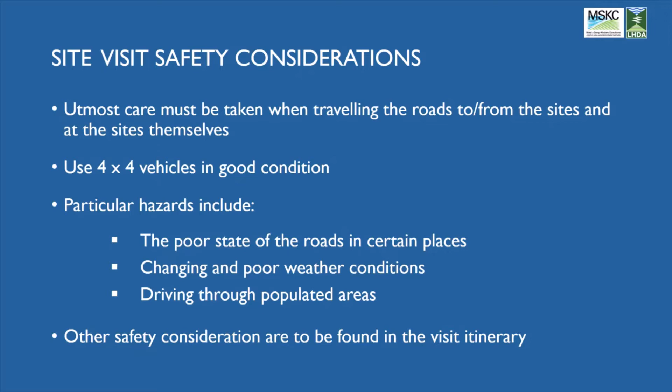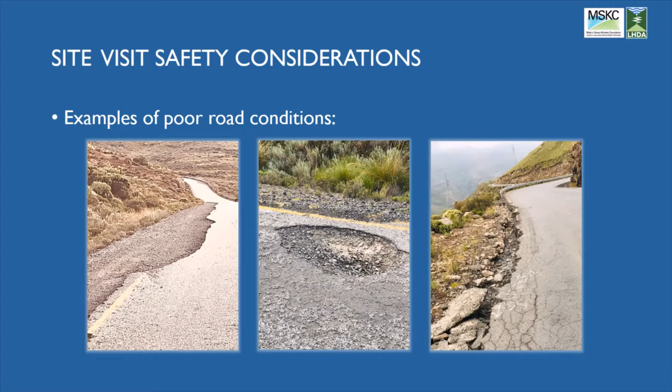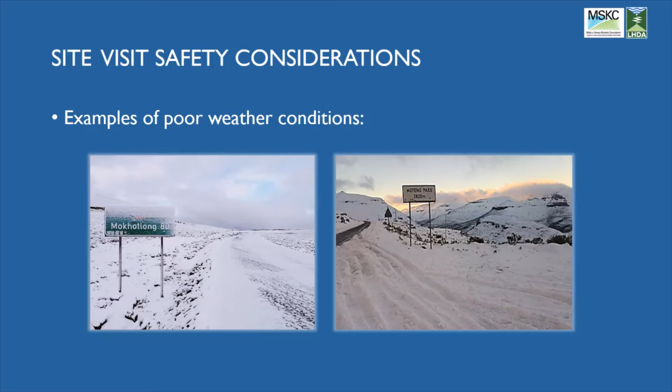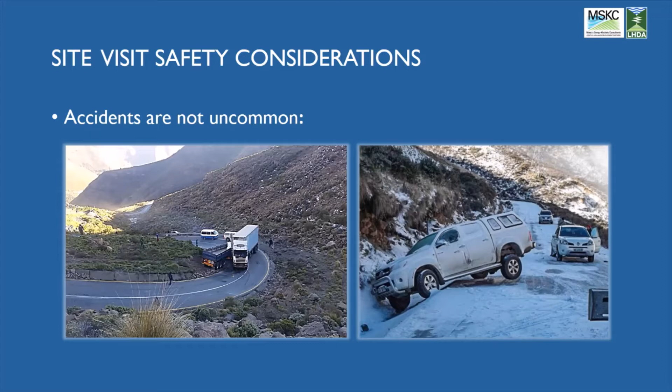When you're driving through populated areas, you need to be aware of pedestrians and particularly children that could enter the road unexpectedly, so make certain you drive through slowly. And also be aware of livestock, which can also enter the road suddenly. With that, I'll hand over to John for the LHDA presentation. Thank you, John.

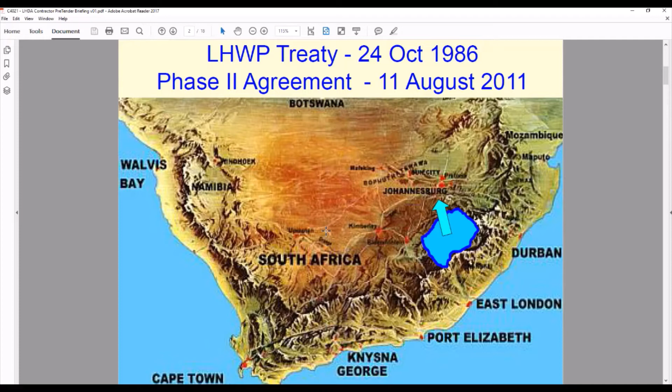John was about to say, I think, that the project has been a long time in the making. The treaty was signed 24th of October 1986, the phase 2 agreement, the 11th of August 2011. I think we all know that the purpose of the project is to transfer water to Gauteng in South Africa.

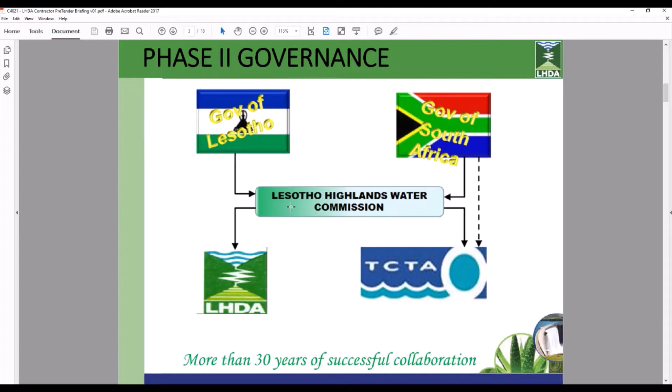Organogram of the Phase 2 project, Lesotho Highlands Water Commission. We have the LHDA board, the Phase 2 subcommittee, the project management unit of LHDA. There is also a panel of experts reporting through the project management unit to LHDA. And then we have the consultants, such as MSKC and other stakeholders, and then the contractors. Also at Water Commission is the TCTA board subcommittees.

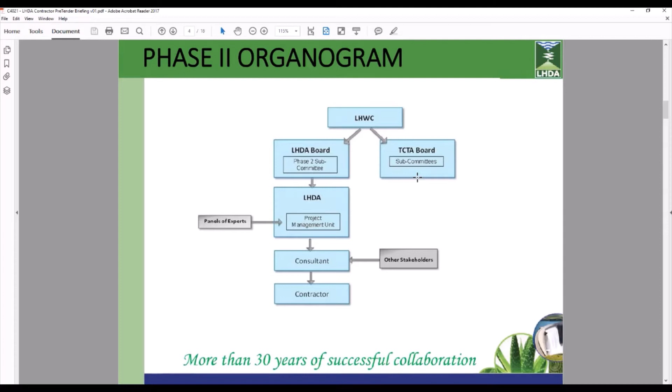Hi, Jonathan. Sorry to interrupt. We have got John back on the line. We are just enabling his audio. Okay. So, John, when you're able to join, we are on slide 5 of the presentation. Thank you very much, John. I apologise, everyone. I'm sure this is irritating everyone nearly as much as it's irritating me. We've updated everyone, John. You are welcome to continue at this stage. Okay, thank you very much.

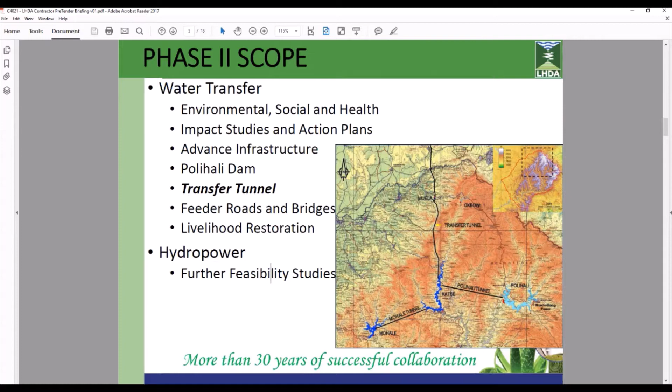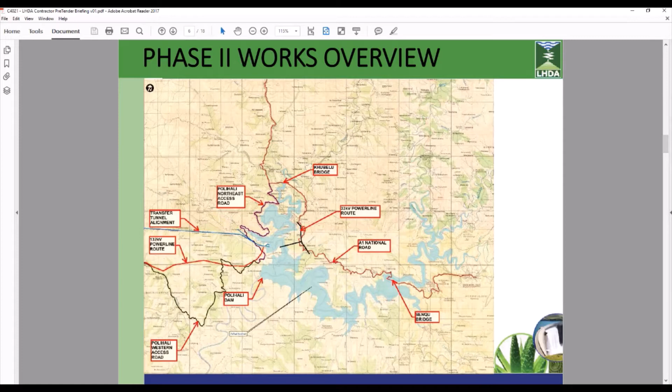So the tunnel itself crosses underneath a pair of mountain ranges. The reservoirs are at approximately 2,000 meters altitude. The tunnel obviously is just below that, is permanently submerged, and the tops of the mountains go to over 3,000 meters. So there's around 1,000 meters of cover in places. As I mentioned, it's almost 40 kilometers long, with a variety of access tunnels and so on. Next slide, please, John.

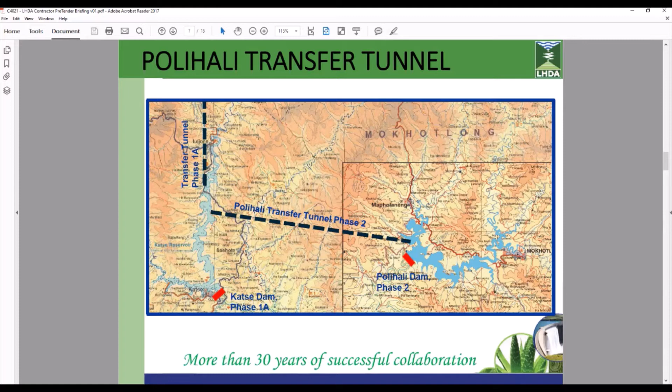So progress so far. We started the whole process of procurement, recruiting engineering, environmental and social consultants in 2014. There's been a large amount of community interaction. We've demarcated the reservoir with a series of bollards around the reservoir. There's a large program of registering assets. We're flooding 50 square kilometers of land, so that has a major impact on people's land and properties. There are socio-economic development programs. We've had geotechnical investigations, environmental impact assessments, environmental management plans, and then the engineering design, procurement of contractors, and as I mentioned, infrastructure is currently under construction at the moment. Thank you, John.

One major issue which arose during phase one was a matter of corruption, which ended up involving court cases and even jail sentences. We are extremely keen that we have no taint of corruption on phase two, and as far as I'm aware, there has been no hint of any corrupt practice anywhere within the project team or any of those associated with it, which is very good news. So there's a strong anti-corruption policy which is bound into your tender document. That's bound into every contract. We have very much a zero tolerance approach to corruption.

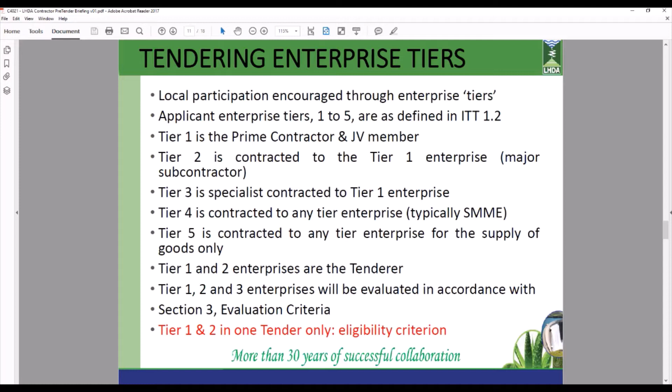Note that your tier 1 and tier 2 contractors can only be in one tender. We've had cases where a contractor tries to appear in multiple tenders - that causes serious problems and will lead to somebody being disqualified. So for goodness sake, check that out. Make sure your core team, your tier 1 and tier 2, is exclusive to this tender. Thank you, John.

For each organization - and we've got a large number of people listening in on this call, there'll be even more drawing documents and looking - not all of those are major international contractors. The thing for you to do is look and say, where do you fit in the tier structure? What can I offer? Are you the major firm that's going to be a JV member, a main subcontractor, specialist, small, medium enterprise, or a supplier?

There are many, many opportunities. If you're putting a tender together as one of the leads, there is a supplier database on our website - that's effectively a notice board which allows any organization to advertise their services.

It is not a list of pre-screened and pre-recommended LHDA suppliers. It's simply a notice board. It's up to you to screen anyone on there. Just to emphasize, there are no LHDA recommended suppliers, no organization already chosen by LHDA for any part of this project still out to tender. That's entirely up to you. We've had individuals approaching organizations saying, if you want the job, come to me. That's simply not true. The list is there, the database is there, you can use it to find people who've expressed an interest, but it's simply organizations that have expressed an interest.

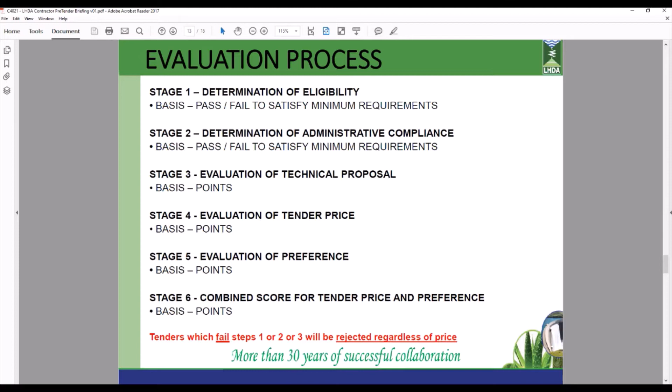I'm not going to go into detail, but we are building a project in a remote mountainous region with some unique environmental issues, and there's a lot of environmental constraints on you, quite rightly. So you need to be aware of that and respond to that. Next one, John.

Although it's a mountainous region, it is inhabited. There's a significant population up there, and those people live from the land and from the environment they're in. So we've had extensive community engagement, and within your document there are a whole series of documents on how to interact with the communities - there's a communication protocol. We have a regional office up there. You need to interact with the communities in cooperation with the client. There's a land access protocol.

You'll be given access to designated areas for your site. You are not free to trespass outside those. If you need more land, there's a whole process for acquiring land. It all belongs to somebody, and you're not free just to wander around at will. Your construction, some of it is near communities, so there are condition surveys on buildings before and after any activities you may have, and you need to make sure that those happen, and then any remediation measures are taken that are needed.

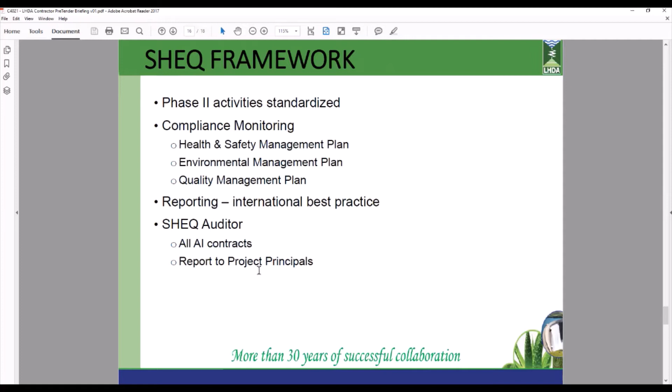Tender guidelines. You will have seen the advertisements in the printed media and on the LHDA website. Respond to the instructions to tenderers. Make certain you read them carefully. Use the templates provided for submittals. These are the returnable schedules. I'll be touching on that in a little bit more detail as we go through the later presentation.

It's a quality-based evaluation and the minimum pass is 60%. There are other requirements that I will touch on. The lowest price is not guaranteed to win. No late tenders accepted. If you don't get your tender in by the deadline, it will not be accepted.

And thank you for that. Unfortunately, John, looks like we've lost John, but we've managed to get through it.

With that, we will continue with the MSKC presentation.

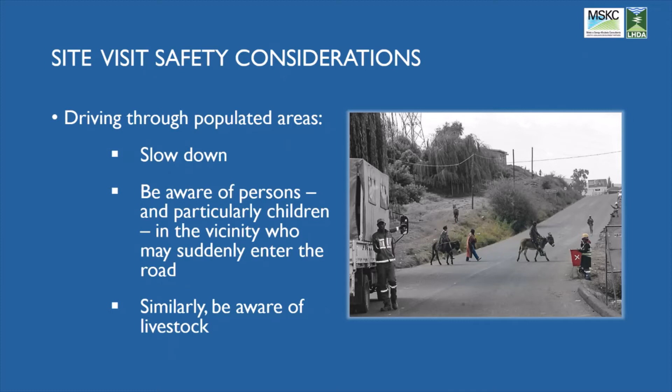Before I start the MSKC presentation, just a few words on the MSKC JV. Who are we? We are the Metsi a Senqu Khubelu Consultants joint venture. We are responsible for the tender design and documentation, detailed design and the site supervision of the construction of the Polihali Transfer Tunnel.

We have 5 main partners that you can see there, all international, but we are working through the South African offices. We have 3 sub-consultants that you can see there. This information is important because, as John mentioned, you will have to submit a declaration of any actual or potential conflict of interest in relation to MSKC.

Moving on to the presentation itself, it's in 2 parts. I will go through the tender documents and procedures, and then Michael will go through the technical aspects and some associated commercial aspects.

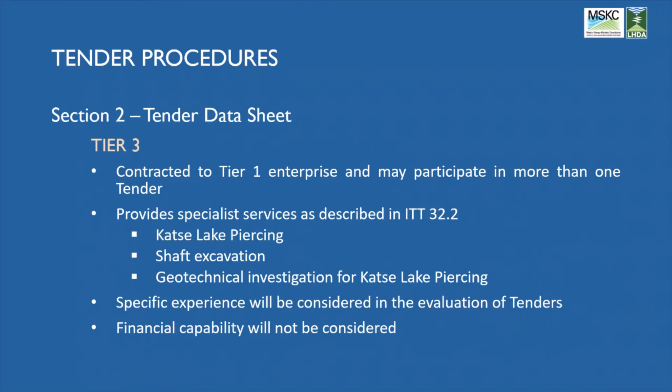Just a reminder there that for the purpose of the tender evaluation, the Tier 1 and Tier 2 enterprises are considered the tendering entity. Alternative tenders, not permitted.

Alternative technical solutions are permitted for certain parts of the works, subject to restrictions, and you can find those restrictions in ITT 12.4, but we will only evaluate an alternative technical solution of the preferred bidder if he has submitted a conforming technical offer. So note that we will only look at the alternative technical solution, if any, offered by the preferred bidder, and that will be on the back of a conforming technical offer.

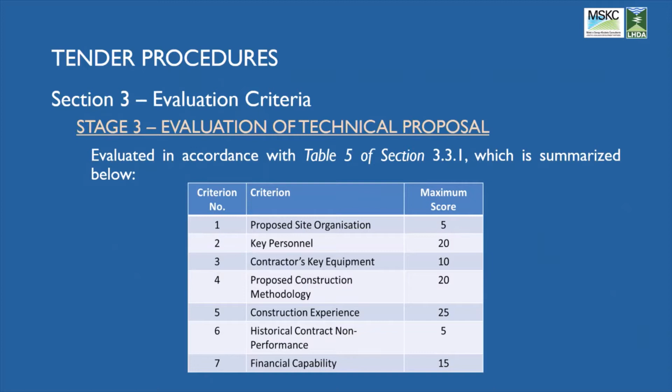To proceed to stage 4, financial evaluation, you must score a minimum of 60% overall and 40% of the score against the subtotals for the criteria identified there. So please make certain you understand that.

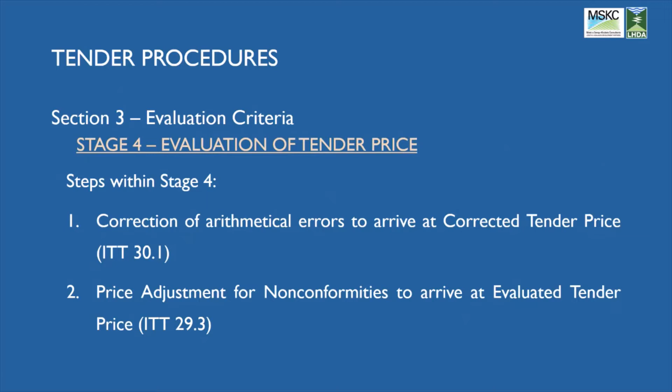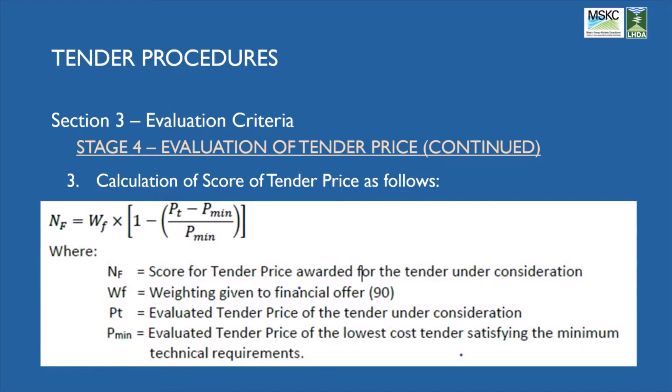You will see in the tender documents, in the letter of tender and in Part F of the bill of quantities, we do expect that you will provide an all-inclusive price for the provision of facilities management of the Polihali village. But note that this price will not form part of the tender price for the evaluation of the tenders for the transfer tunnel itself. It is simply a price for the employer to decide where to place this work, which will either be in the Polihali transfer tunnel or the Polihali dam, but you are required to price it.

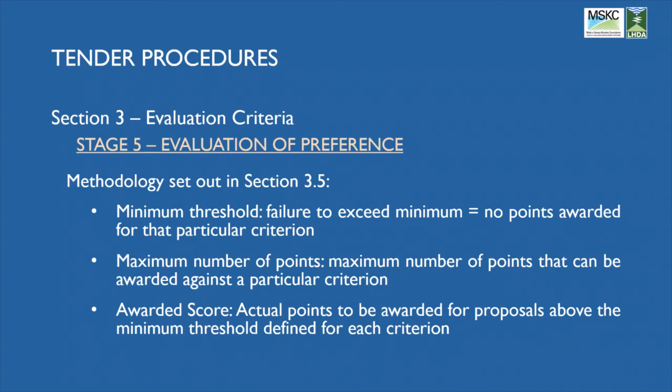Stage 5, evaluation of preference. The methodology you can find in section 3.5. There are some definitions there. Please note there are no points for meeting the minimum thresholds. You have to exceed the minimum thresholds to garner the points. The preference criteria are either a disqualification criteria, which is self-explanatory, or a condition of award. With a condition of award, you won't be disqualified immediately, but the preferred tenderer will be required to demonstrate compliance prior to the award of contract.

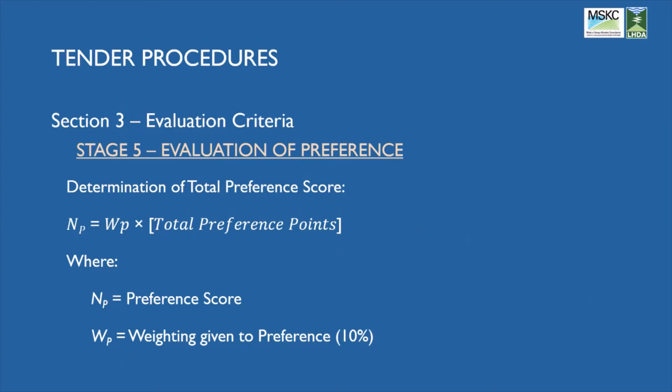Determination of the total preference score. You can see the formula there. And you will see also that the weighting given to the preference is 10%. Calculation of the total score for a particular tender is simply the sum of the tender price and the preference scores. So if you remember, there was a weighting of 90% for the tender price and 10% for the preference score, and it is simply the sum of the two scores to determine the ranking.

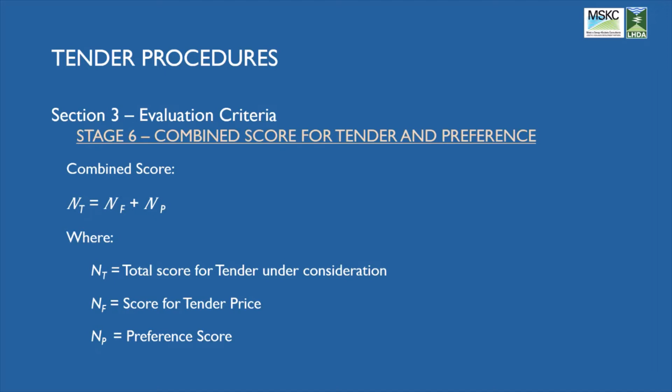Moving on to section 4, returnable schedules. Please note the importance of the returnable schedules. You must ensure that they are all submitted properly to ensure the completeness of your tenders. If you don't, your tenders may be considered non-responsive. There is a checklist. Please use it. I don't think it has to be submitted, but it will guide you as to whether you've completed all the returnable schedules.

Please provide the information in the format requested, and don't refer to separate lists, company brochures, and the like. Do not provide any information that we haven't specifically requested, because that information will simply be ignored. So please don't waste your time with that. Provide the information that we specifically request. And just a note at the bottom there that for each of the schedules, please paginate your pages.

Finally, section 5, corrupt and fraudulent practices. John has noted the importance of these documents, and I've just identified them there. The Lesotho Highlands Water Project anti-corruption policy. Note and understand that. The procedure for dealing with conflict of interest. That is where you will see the acknowledgement and disclosure form that will be submitted as returnable schedule 4.2.1, and the funding agency fraud and corruption requirements. Again, please make certain you understand these documents.

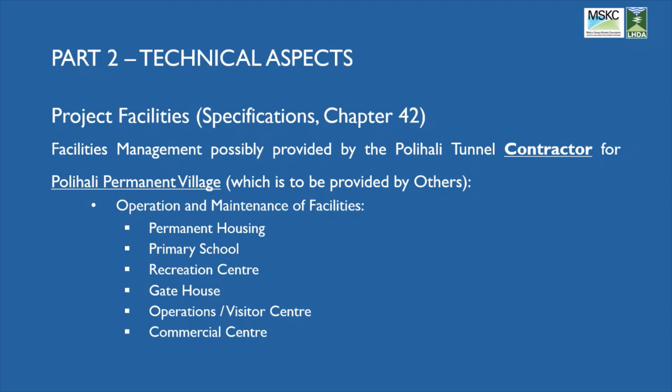We also had a look at the aggregates required for the works. We identified two main quarries, one on the Polihali side, which is the Tlokoeng West quarry, located in close proximity to the works area, meaning the area where we have foreseen the batching plant and segment factory to be set up. And in the Katse area, we have the existing northern access road quarry, and this is going to be extended. The northern access road quarry is the location where those who are going to attend the site visit will meet on the 15th of June.

In addition to that, we have identified borrow areas in the tender documents. These are typically along the access roads. The contractor is of course also free to come up with his own quarries and borrow areas, and those have to be approved by the employer. In addition to that, the contractor can of course also rely on commercial sources, but please be informed that in the highlands such commercial sources are very limited or non-existent.

We have included in our tender documents a high-level construction schedule in section 6. The overall construction period is about 65 months. We have also set 2 milestones. Milestone 1 is after about 31 months, and this requires the completion of essential work items for the impoundment of the Polihali reservoir. These are in particular the upper and lower intake structures, the upper and lower intake tunnels, and the Polihali gate shaft, complete with fully commissioned stop-logs.

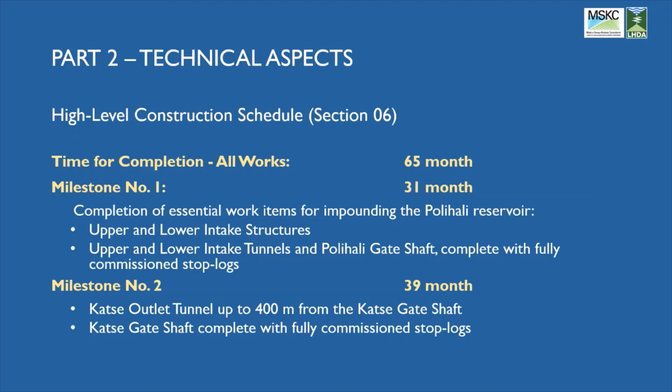The second milestone is on the Katse side. For that we have foreseen a duration of 39 months, and this requires excavation of the Katse outlet tunnel up to 400 meters from the Katse gate shaft. And the Katse gate shaft itself has to be completed with fully commissioned stop-logs. The reason for that is that we want to have as much time as possible available for the crucial component of the project, which is the breakthrough into the existing Katse reservoir.

Now let's have a look into the various underground spaces. Shown here are the adits. We have 3 different adits to the Polihali transfer tunnel. All of them have a gradient of approximately 8%. They have a length between 900 and 1700 meters. And please note that the cross section and the intersection point with the Polihali transfer tunnel can be adjusted to your requirements. And these adits are not going to receive a final concrete lining.

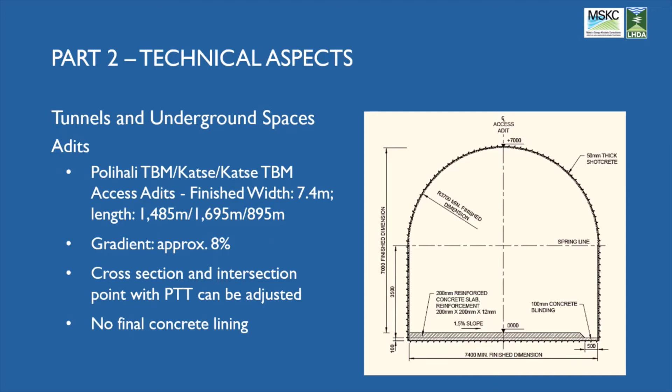Now the waterway tunnels, all of them are going to have a 4.5 meter internal diameter. First of all, about the drill and blast waterway tunnels. All of them will receive a 300 millimeter cast in situ unreinforced concrete lining, apart from the last one here in our list, the Katse outlet tunnel, which will receive a 500 millimeter cast in situ reinforced concrete lining.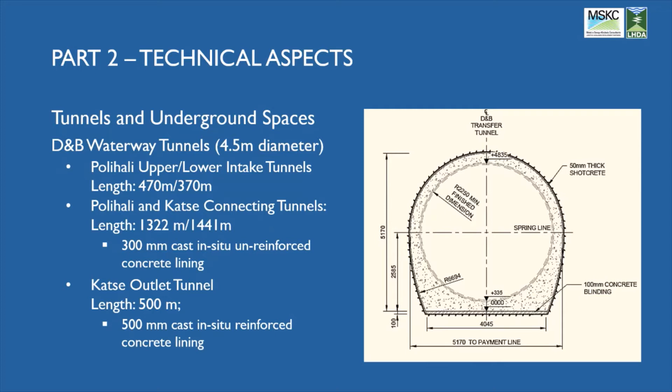The reason for that is that the area between the Katse gate shaft and the final breakthrough point, so the lake tap, will not be accessible ever again once the final blast is taken. So we have to make sure that this is a permanent solution. The TBM waterway tunnel has also a 4.5 meter internal diameter. It's a good 34 kilometers long.

It will be lined by 250 millimeter steel fibre reinforced and gasketed precast concrete tunnel lining, and this is a single pass lining. It will be backfilled with a 2-component grout right through the tail shield of the respective TBM. And please also note that pea gravel and grouting of the annulus through the segments is not allowed. So please do not waste your time coming up with a proposal of pea gravel and grouting through the segments. It will not be considered.

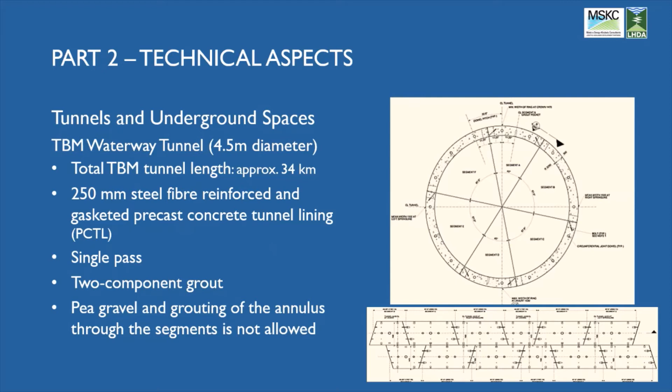Important for our TBM drive is that we have foreseen 2 new and strong shielded hard rock TBMs. Whether they are single or double shield TBMs is up to the tenderers. Important to notice also that we have foreseen probe drilling of a minimum length of 120 meters up to 200 meters capability, and each of these probe holes has to be surveyed with an acoustic or optical televiewer. And we are going to have overlapping probe drills with 40-meter minimum overlap, so the entire length of the TBM tunnel will be probe drilled.

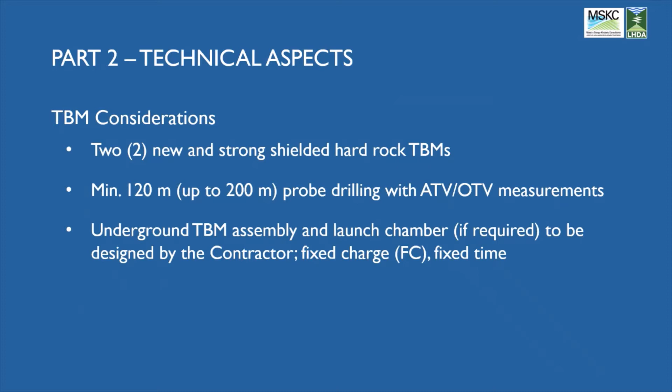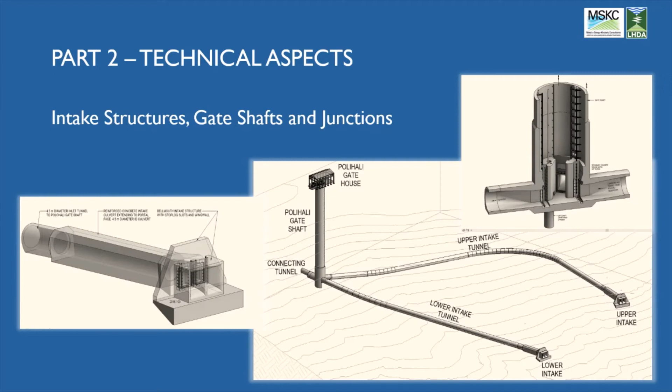Also note that underground TBM assembly and launching chambers, if required by you, are to be designed by the contractor, and for that a fixed charge and a fixed time has to be foreseen. If we have at first a look at the intake area, we have here on the lower left side the intake structures, and these lead into the lower and upper intake tunnel. These two tunnels meet at the Polihali gate shaft, and on top of the Polihali gate shaft, we have the Polihali gatehouse.

About the two shafts, one at Polihali and one at Katse, we have foreseen both being excavated by the raise boring method, followed by slashing from the top down. The shafts are a good 100 meters deep. Please note that the Polihali shaft is open to the surface and the Katse shaft has an adit, so it's not open to the surface. Both shafts have a final diameter of 10 meters and are designed to have a 600 millimeter cast in situ reinforced concrete lining.

Then, as mentioned already before, the lake tap and rock trap are the most crucial component of our project. They are not typical to underground projects, so therefore we want to see method statements for the excavation and the support. And we definitely want to see a specialist subcontractor for these works, a firm having experience with such works and also individuals having experience with such works. And the entire lake tap area and rock trap area is going to be reinforced with a cast in situ reinforced concrete lining.

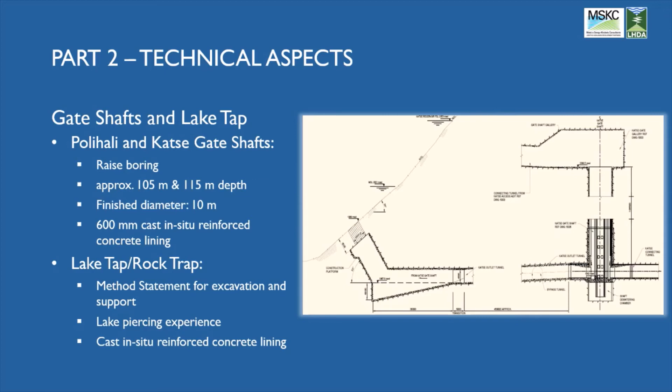About the intersections between the Polihali transfer tunnel and the adits, we have given an indicative junction alignment in our tender documents. The contractor is free to optimize the angle, radius, and dimensions. If you divert from what is given in the tender documents, you as the contractor finally have to come up with the temporary support and the final lining design, in case you deviate from the tender design.

And also, if you are coming up with a TBM assembly chamber underground or any other widenings required by the contractor for the TBM and other operations, those are to be designed by you and are to be completely backfilled with concrete and grouted.

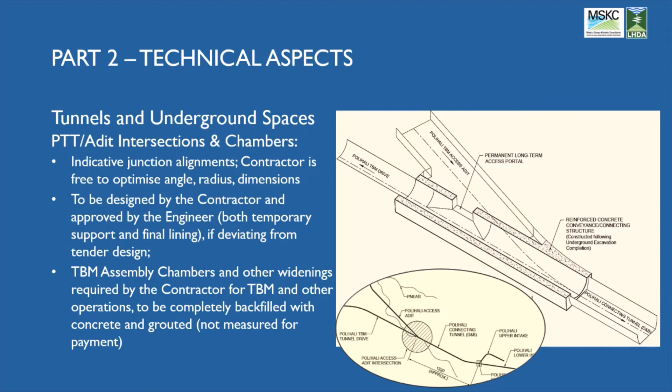The project is located through its entire length in Lesotho basalt and will be intersected by a series of lineaments which are subvertical. The water inflow is expected along these lineaments. Details are given in the GBR. The horizontal basalt flows are foreseen to be fairly tight, and therefore it is unlikely that we have very much water inflow, so it's primarily at the lineaments. We have made a forecast of the groundwater inflow, and based on that, the contractor shall propose a system to avoid flooding of the tunnel drives, in particular of the TBM drives, to a minimum capacity of 160 liters per second per tunnel heading.

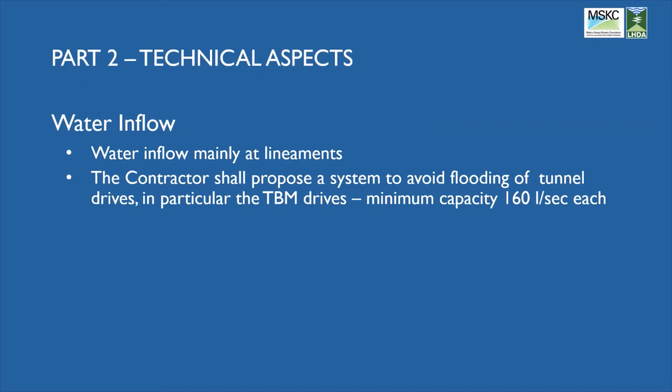The setup is definitely a special one, since it is going to be from barges, and you have therefore to go through water and then drill into rock of various depths. The ones close to the lake shore, 85 meters into rock, and the other ones in the lake tap area between 20 and 50 meters into rock.

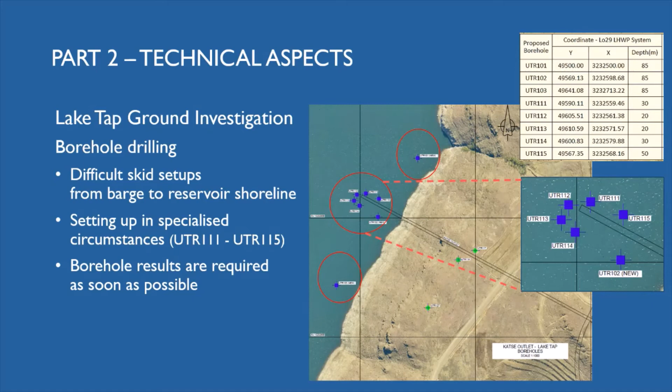Now let's have a look into how we structured our BOQ and the payment of the works you are going to execute. We have at first fixed charges, time-related charges, and provisional sums, which are described in detail in chapter 1 of the specifications. And then we have quantity proportionate charges, which for the underground works are especially in specifications chapter 10, 13, 14, and 26, amongst others, but these ones are the most relevant ones.

So our BOQ is then structured in a particular way. We have various works areas, works area G1, G2, and G3. G1 is the overall project, G2 is the Polihali works area, and G3 is the Katse works area. In addition, as mentioned before, we have in our BOQ provisional sums, which are shown in part Y of the BOQ. For quantity proportionate charges, we have in our BOQ the parts C, V, and W for civil and electromechanical parts.

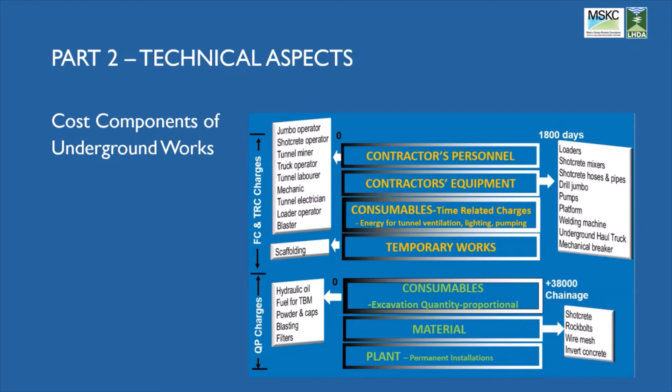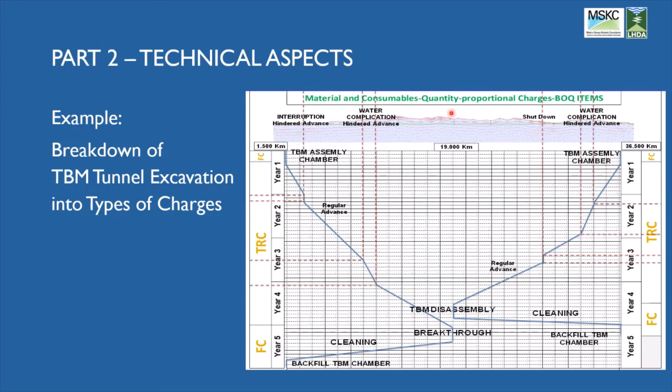Now let's have a look into details of the payment method for the drill and blast tunnel. This is given in chapter 1 of the specifications. Details are shown in specifications chapter 1.11.9.3, and this is based on the Austrian standard B2203-1. We very much encourage you to get a copy of this Austrian standard and familiarize yourself with it. It is an agreed and equitable method for determining the compensation due to the contractor for changes in rock support within the defined tunneling classes, and also for conditions outside the defined tunneling classes, both in terms of time and money.

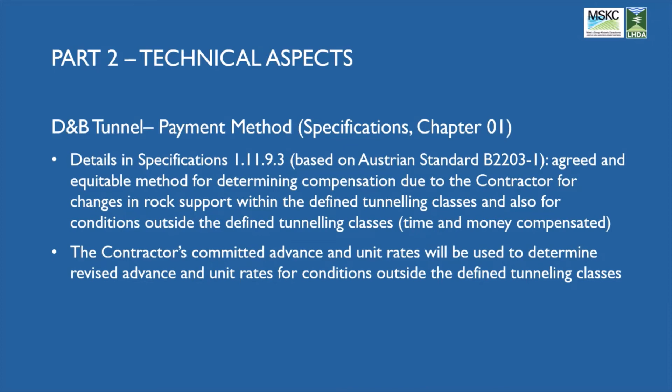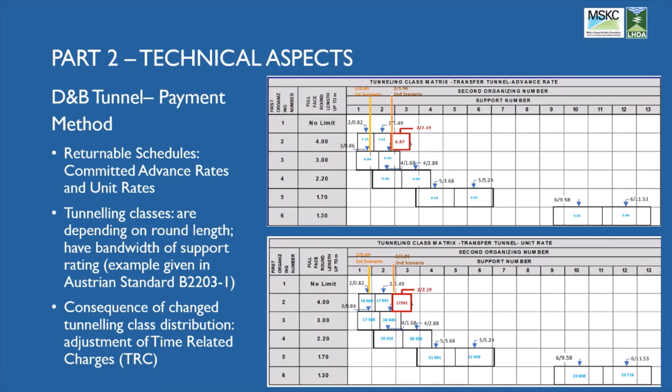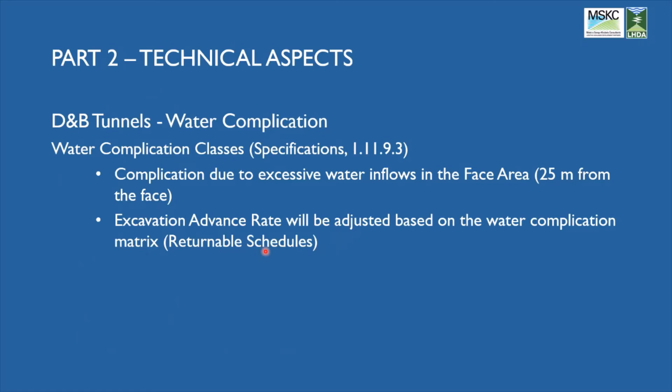In addition to the tunneling classes, we also have water complication classes. This applies to excessive water inflow in the face area, defined as 25 meters from the tunnel face. We have given in our returnable schedules a matrix for water complication depending on the amount of water and the severity of the inflow, and in which way it hampers the advance works. Based on that, the foreseen advance rates in the tunneling classes are reduced by a certain factor, which is defined in this returnable schedule by you.

Furthermore, we may have tunnel interruptions and temporary suspensions, also mentioned in the same specification chapter. Tunnel interruptions are times during which works are carried out in the face working area, but not excavation, for example probe drilling, fissure grouting, or treatment of overbreak. Temporary suspension is something instructed by the engineer. In both cases, you would get the time as per actual.

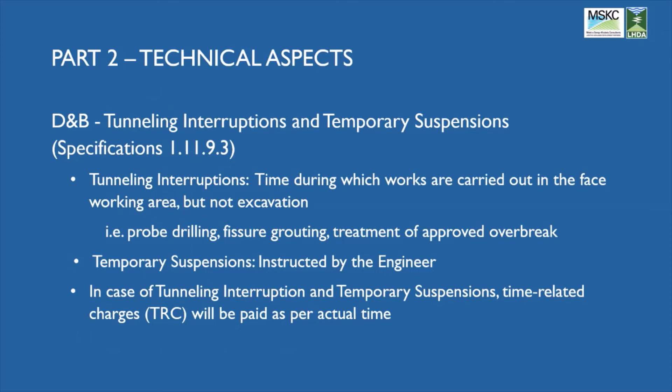Now let's look at the payment method for the TBM tunnel. This is defined in the next subchapter of the specifications, 1.11.9.4. It's also an agreed and equitable method for compensating the contractor for ground conditions within the defined penetration classes, called regular advance, and for conditions outside the defined penetration classes, called hindered advance.

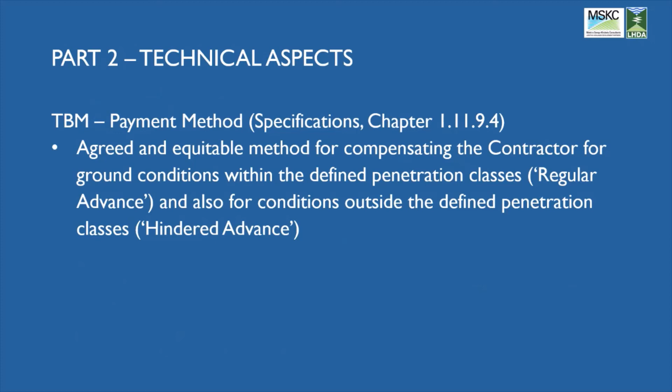What you now have to do is populate this table by telling us your committed advance rate for these various penetration classes in meters per day. A division of the baseline length by the committed advance rates gives you the duration of each penetration class and the total duration, and adding everything up will finally lead to the total duration required for excavating the whole TBM tunnel.

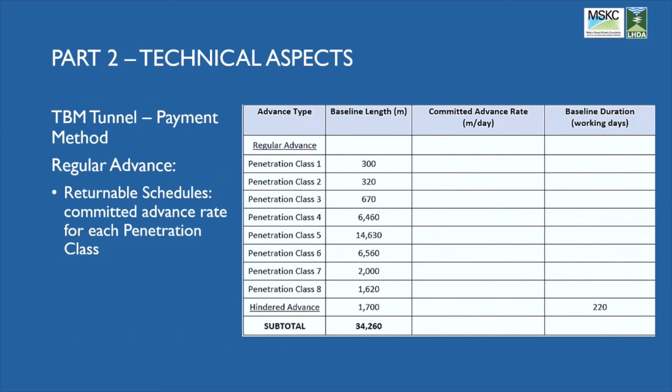So what are the committed advance rates? At the end, you have to include everything that is in your sphere of responsibility.

This includes, amongst others, the support installation, which is the segment lining and the annulus grout, the waiting time, daily and weekly stoppages for maintenance which are compulsory, stoppages due to TBM backup or logistic difficulties, forward probing up to 200 meter length with 40 meter overlap, and the acoustic and optical televiewer survey, regular drilling and grouting, which has to be completed within 2 kilometers from the end of the backup, and any non-advance activities within your sphere.

So at the end, you have to determine what will be your TBM utilization factor, and you have to tell us this by coming up with the right values for your committed advance rates.

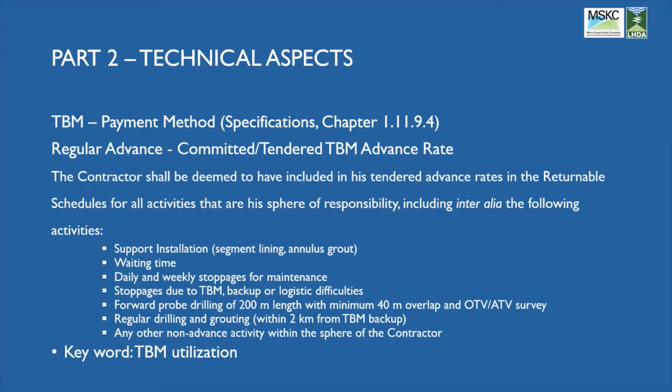The TBM time-related charges payment mechanism is machine performance based. For that, we have established the so-called torque factor, which is given in the specification chapter 1.11.9.4. Please read that carefully to understand how we are basing the regular advance.

Using this machine performance-based method means that we are using machine data instead of very infrequent lab and field test data. Because we're using the machine performance data, tunnel geological conditions like mixed face conditions and so on are not directly connected to the payment of the time-related charges. And subjective methods like face mapping are also not used as a classification tool.

The advantage is that we can come up with penetration classes for every stroke, since we get data every couple of seconds, so we evaluate every stroke. This allows us to come up with a clear separation between regular and hindered advance.

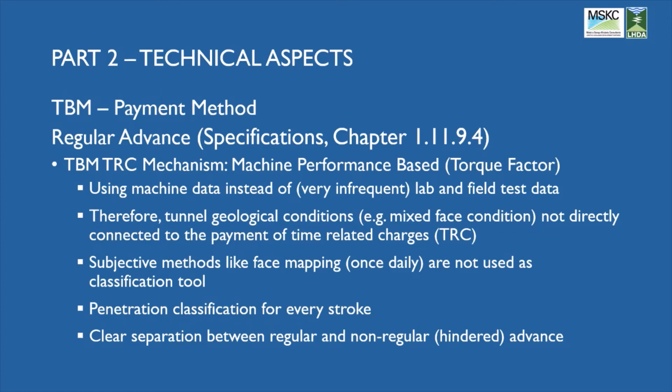So once again, about the regular advance: the payment for regular advance is based on the penetration classes which we discussed before, and this is based on a torque factor that has to be between 0.65 and 1.2. The torque factor within this range is typically characterized by all cutters being in contact with the face.

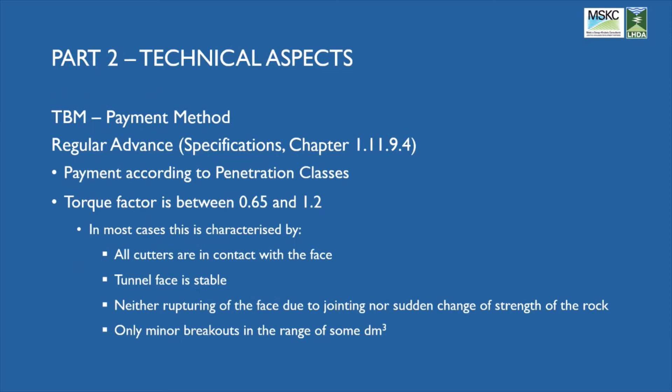That the tunnel face is stable, that we have neither rupturing of the face due to jointing nor any changes of the strength of the rock, like varying ground conditions at the face. And only that we typically have minor breakouts in the range of a maximum couple of cubic decimeters.

Now, regarding regular and hindered advance, we have come up with an example of the torque factor evaluation. This we have done for the Mohale tunnel, which was built in Lesotho many years ago, but we have the TBM data of that time, and we did the evaluation of these data. It shows us, over a length of 6 kilometers, every single stroke - every such line is one single stroke.

And over here we came up with the torque factor. As long as we are between 0.65 and 1.2, we are in the regular advance, and everything outside of that is hindered advance - whether it's below or above. As you can see, there are not too many strokes which are considered as hindered advance.

We had a look then at the geological documentation, and we found that, for example, over here and over here, there were problems of the rock mass. It was a lineament, or in both cases lineaments, and there were some difficulties, and for that reason the torque factor fell below this threshold value of 0.65.

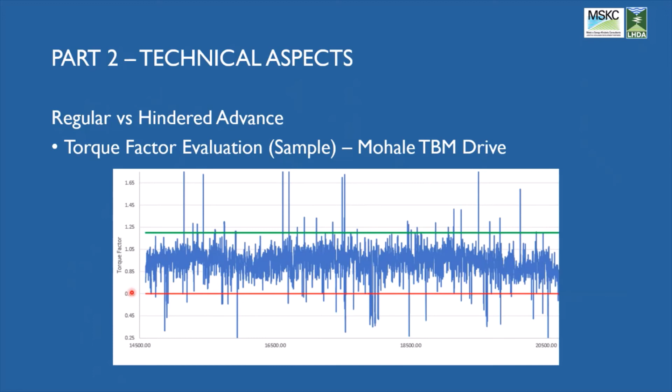Hindered advance, as already outlined in this previous graph, is now everything outside the regular advance. Therefore, if the torque factor is below 0.65 or above 1.2 - below 0.65 is typically because of high shield friction, meaning we have loose material resting on the shield. And above 1.2 is typically that we have blocky material, that we have instability at the tunnel face.

So the hindered advance is the result of the reduction of the performance parameters of the TBM, or reduced degree of utilization of the TBM, as a result of increased inspection, maintenance and repair caused by the behavior of the tunnel face, crown and sidewalls.

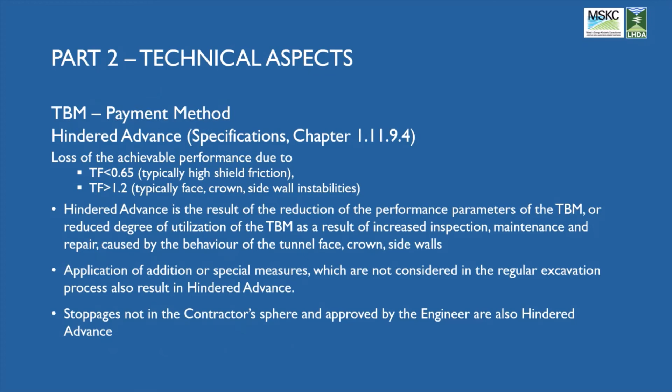The application of additional or special measures which are not foreseen in the regular excavation and support process will also result in hindered advance. And stoppages not in the contractor's sphere and approved by the engineer are also to be considered as hindered advance, for which you're going to get time approved as per actual.

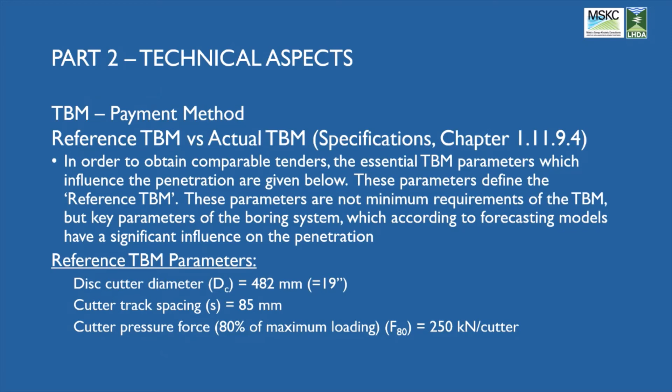We do not want to see 17-inch cutters. But these are key parameters of the boring system, which according to forecasting models have a significant influence on the penetration. Now the actual TBM, for which...

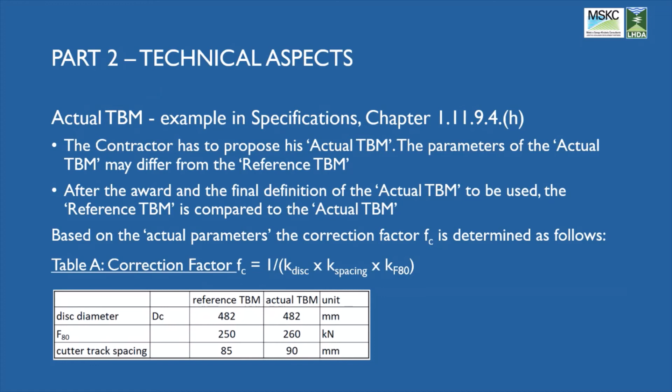We have an example given in the specifications chapter 1.11.9.4.(h) - you may have a look at that. The contractor has to provide and propose his actual TBM, and the parameters of the actual TBM may differ from the reference TBM. So once again, the reference TBM is used primarily to compare between the various tenders.

So after the award and the final definition of the actual TBM to be used, the reference TBM is compared to the actual TBM, and we come up with a correction factor as given below here. This purely depends on these three parameters - the disc diameter is one of them.

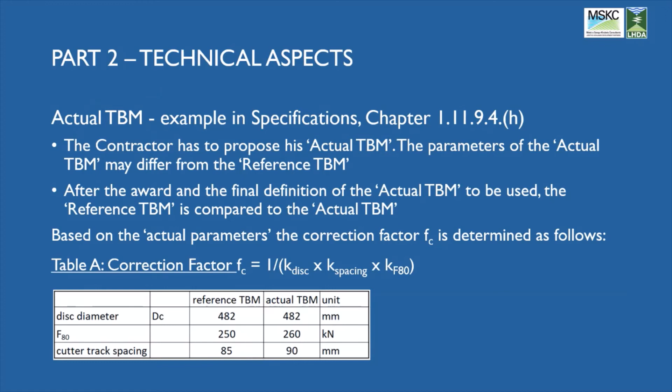Then we calculate the cutter head thrust simply by multiplying the thrust per cutter, or the force per cutter, with the number of discs we are using. In this particular example, we said we assume that F80 is 13,000 kilonewton.

However, the correlation and correction factors, which I mentioned before, based on the fact that your actual TBM may differ from the reference TBM, as well as the difference in theoretical thrust and what you actually thrust forward with, would have resulted in a higher penetration rate. And this penetration rate would fall within the 7 to 9 millimeter penetration class, which is penetration class 3.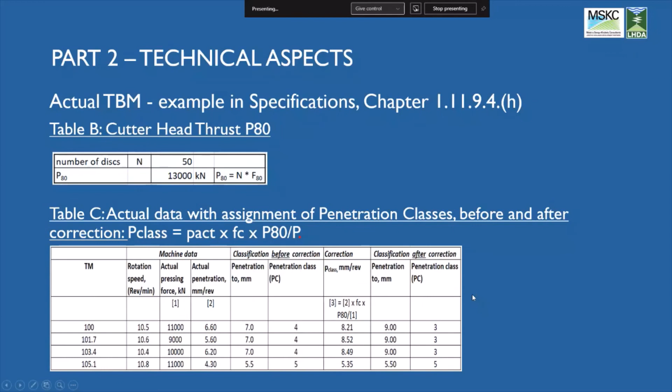Could you please clarify if a foreign company could participate in the tender as a sole tenderer without the local partner? The answer to that is yes. How the tenderer manages their own risk is a matter for the tenderer. However, you should note, if that's the way you will go, that you have to meet the preference requirements for national participation. So in theory, there's nothing stopping you tendering on your own, but you need to comply with the minimum preference requirements.

John, could I just jump in there? Unless an organisation happens to be registered in Lesotho and registered in South Africa and be a foreign organisation, you're going to be disqualified. As we spelt out at the beginning, there are minimum participation requirements within the tender. So it's not just people, it's as an organisation, and there are definitions of what constitutes a Lesotho organisation and a South African organisation. You must be teamed with local organisations and you must meet those preference criteria. So although we don't explicitly bar any foreign firm from tendering alone, in reality, I can't see how they can meet those criteria. So that is a fundamental. We said it during the presentation and I'm just re-emphasising it now. So you do need local participation. Thank you, John. Thank you, John.